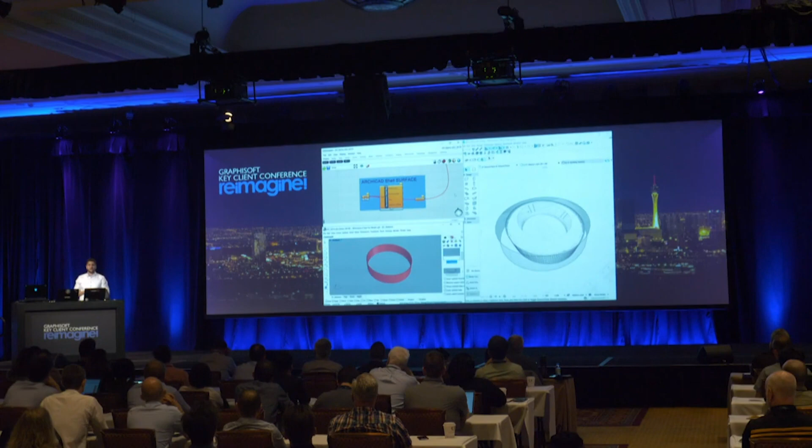Now, what is it good for? On one hand, you can use this surface geometry as an input in Grasshopper and Rhino to generate additional BIM elements. Or, on the other side, you can use this surface information to analyze and optimize the BIM model using the vast ecosystem of the Rhino Grasshopper platform.

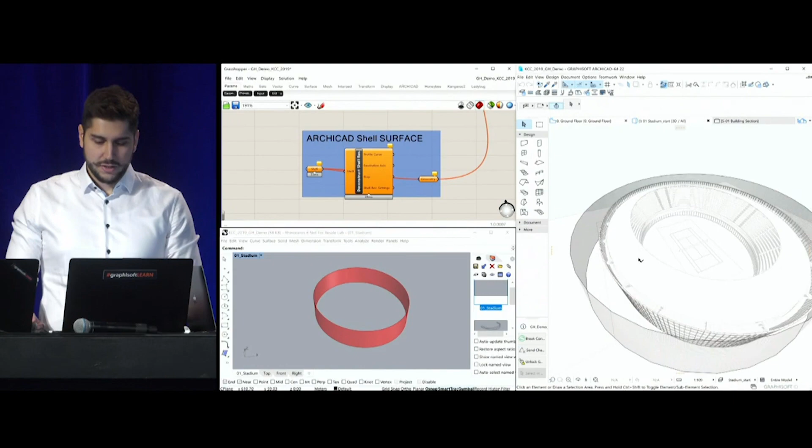So let's see an example for the first one. In this example, we are designing and working on a tennis stadium that is in the early design phase, where we are still experimenting with the building envelope. What I have in mind is a double layer facade consisting of an internal curtain wall and an external perforated metal shell. I would like to use Rhino and Grasshopper to generate a supporting structure between the two layers, using the live connection to experiment and work with the building envelope in the context of the BIM model.

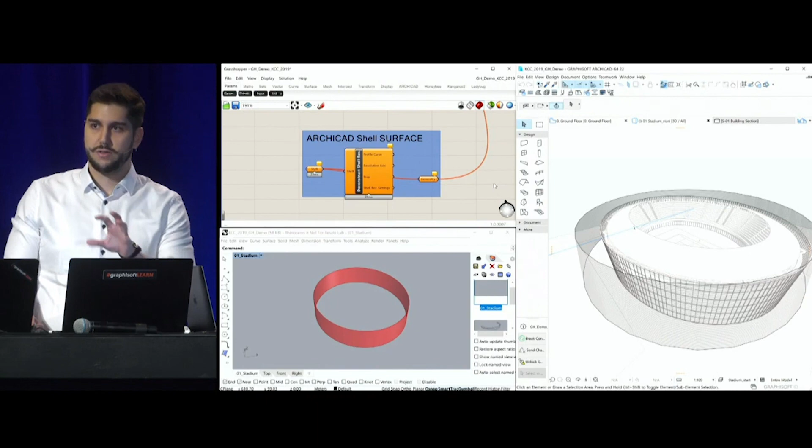So let's see how it goes. I can very simply reference the ARCHICAD shell into Rhino and Grasshopper. And let me show you the structure that I have in mind between the two - it's consisting of beams and columns. So let's just bring those in to ARCHICAD. And very quickly, as you can see, they appeared.

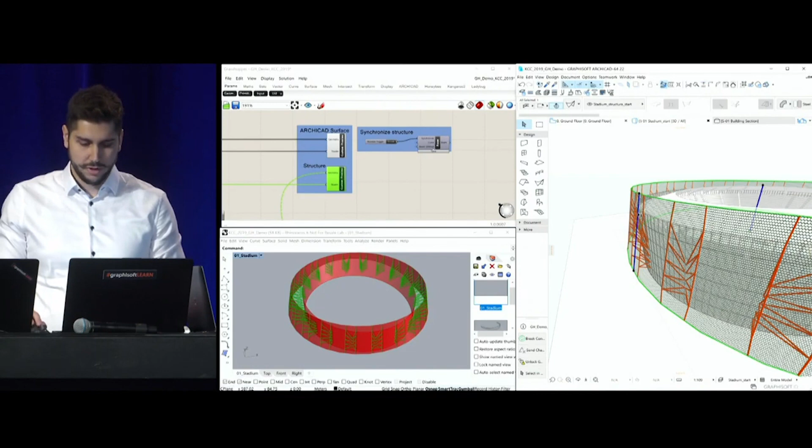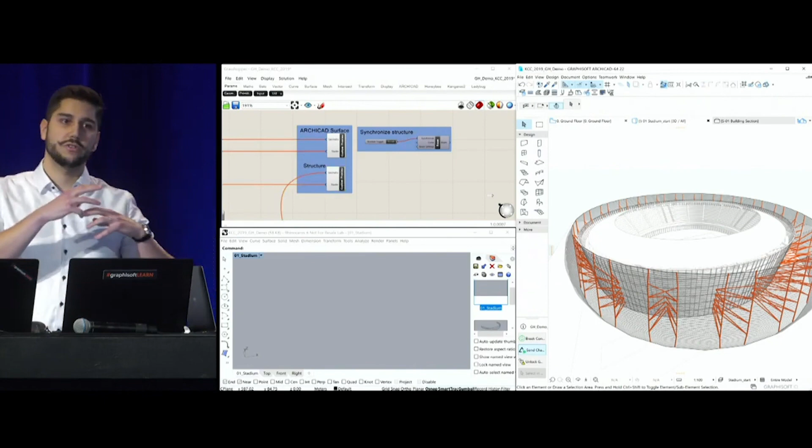But as I mentioned, we are in the early design phase, which means the building design goes through a lot of changes. For example, I would like to bulge and curve the profile of the external shell of the ARCHICAD shell here. Something like this. So now I change the surface geometry of the ARCHICAD element, and by sending the changes to Rhino and Grasshopper, the code recalculates the structure between them, and it bulges according to the surface geometry.

This allows us and allows you to discover more different design options and experiment more with the building envelope and try out different variations, basically.

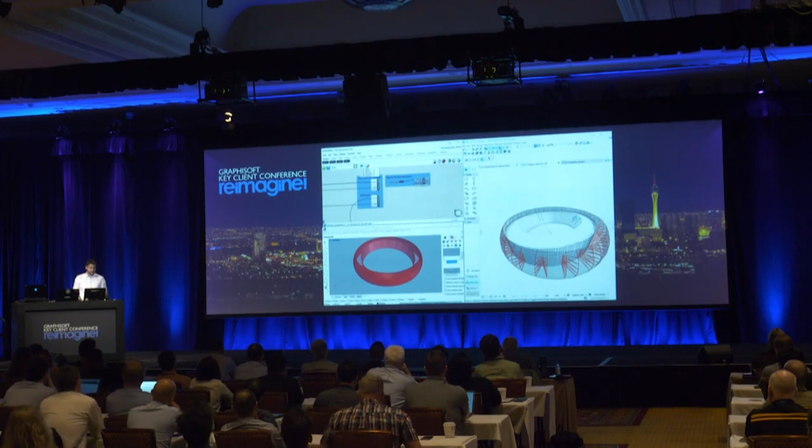All right, but another advantage of the Rhino Grasshopper platform is its amazing ecosystem of plugins, for example for environmental analysis and optimization. So in the next example, I have a nice little restaurant building on this hillside, and I would like to perform a sunlight hour analysis on it.

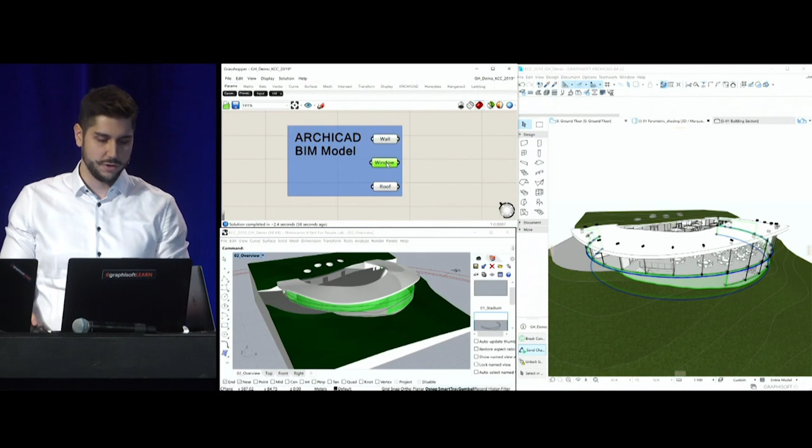Since with the latest version of the live connection we can extract the surface geometry of the facade, later on we can analyze it - in this case I'm going to use the Ladybug add-on of Grasshopper. So I can extract the windows, I can extract the roof geometry, and based on that I can run a sunlight analysis. So let me just show you the result of that.

As you can see in the bottom left corner, my facade is quite exposed to the sun. The red areas are more exposed, the blue areas are a little bit more shaded thanks to the roof. So what can we do to make it a better performing building?

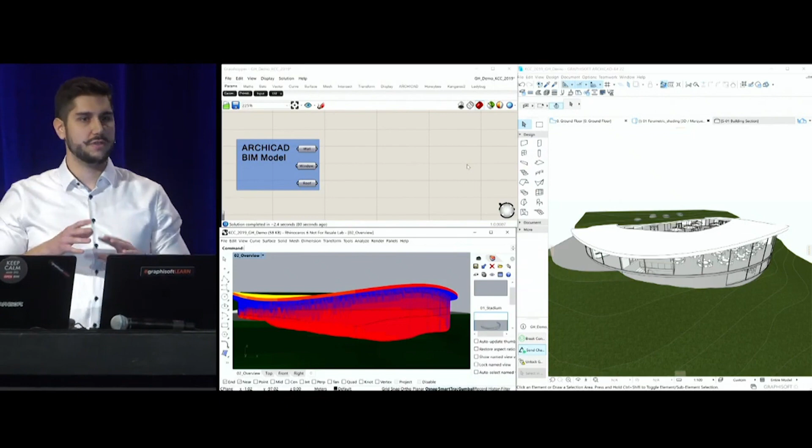Obviously, we have to create some kind of shading system. What I have in mind is a shading system consisting of vertical frames, waving along the building facade. For that, a quite obvious choice would be to use ARCHICAD's parametric complex profiles, an innovation that we introduced last year. So I would like to use this profile, but multiple versions of it.

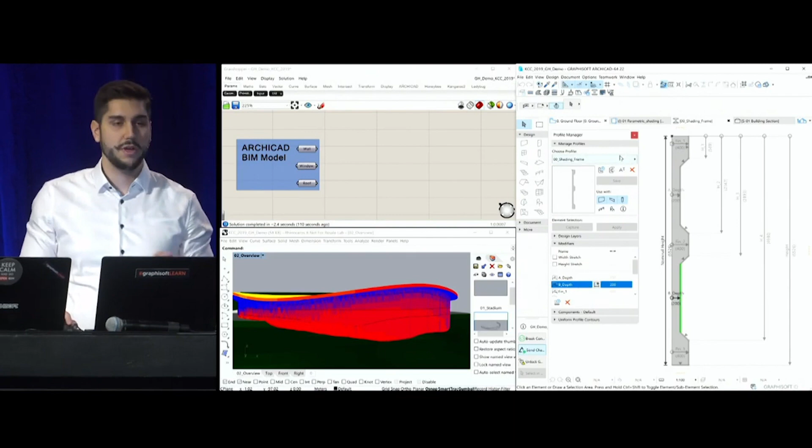And in the latest version, now we can control these offset modifiers from Grasshopper based on some parameters or some curves. So let's just do that. Let's bring in those geometries, and let's see how it affects the performance of our building.

And once the geometry is loaded into ARCHICAD, as you can see, it's nicely waving through my facade. But again...

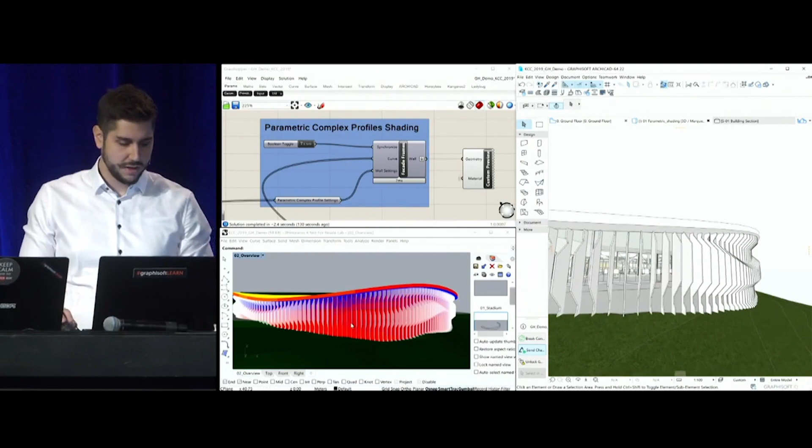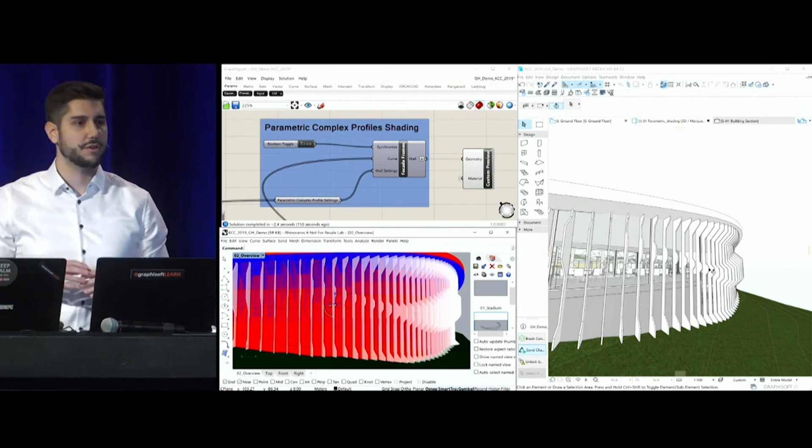Since you might want to try different design variations, you can play along with some Rhino curves. And I believe this is a little bit too much bulged in here. So let's make it a little bit more subtle so that the guests from the restaurant can enjoy the view. As you can see, by just adjusting a little bit of a curve, it opened up the facade.

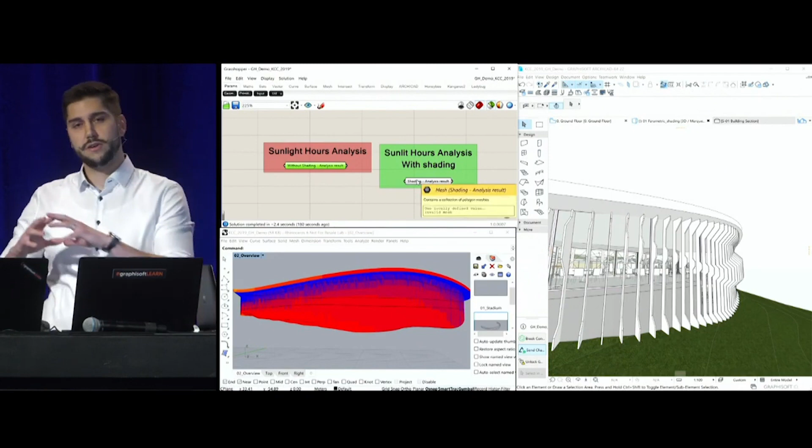So let's see how my analysis looks like after applying this shading system. As you can see, this is the result after the shading system was applied, and this is before that. This is created by referencing the ArchiCAD BIM surface geometry into Grasshopper and just running an analysis very quickly. So as you can see, we could seriously and significantly improve the performance of the building.

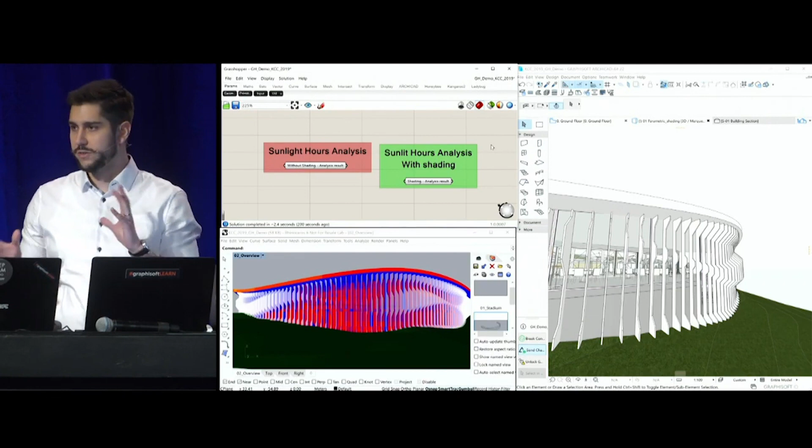And I hope that you can see that using the new deconstruct functionalities and using the parametric complex profiles combined with Grasshopper, you can have much more time for design and have better performing buildings. So thank you very much.